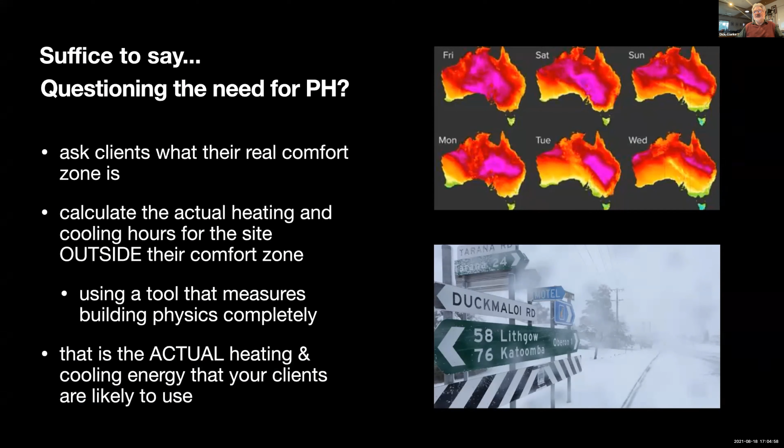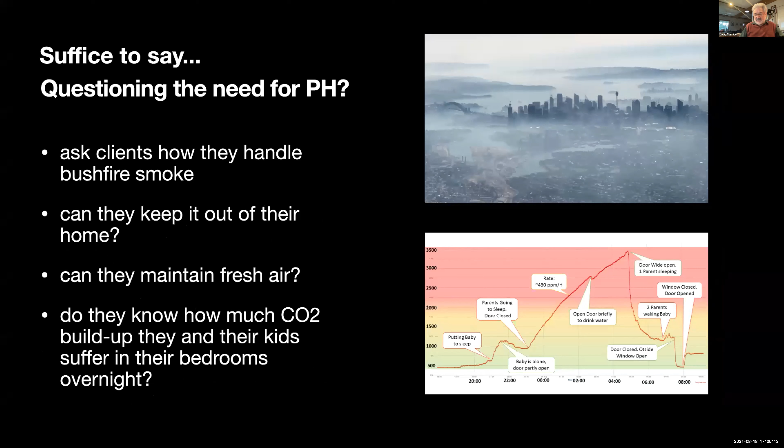So then ask how they handle bushfire smoke. Can they keep it out of their home? Or do they want to keep it out of their home? How do they maintain fresh air? Do they have any idea how much CO2 builds up in bedrooms at night, especially with smaller bedrooms and children? And all of these things really point you towards why would you bother with Passive House.

So you get control of thermal comfort with very low energy input. You can choose when to close up and when to throw it all open, so there's no need to live in an esky all day, every day. Fresh air, with regard to low CO2, is guaranteed when it's closed up, thanks to the heat recovery ventilation. And it can filter, depending on which filtration system you use, which cartridge, up to 97% of smoke particulates, and that's been shown in the last summer, the black summer, from a house in Canberra that was monitored for particulates. So that equals healthy and sustainable, and actually healthy is sustainable, because if it's not healthy, it's not sustainable.

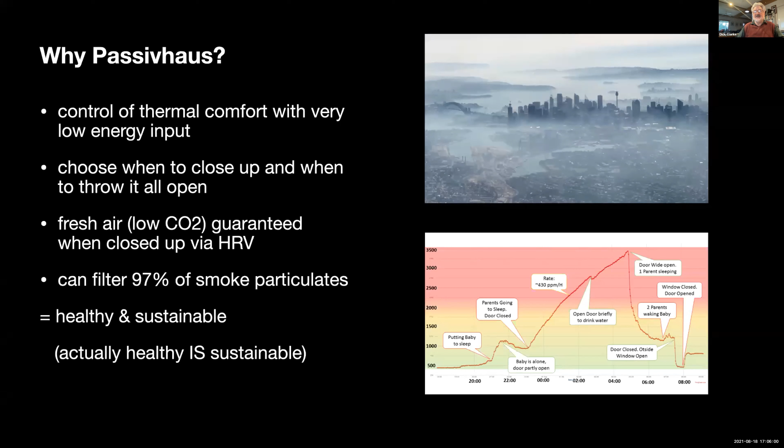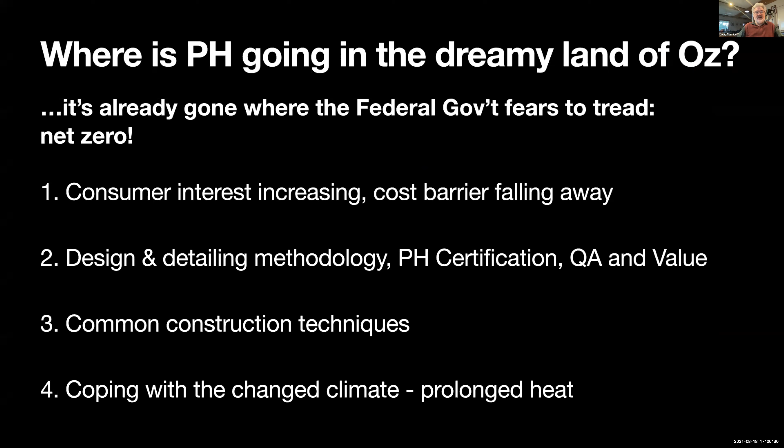So where is Passive House going in this dreamy land of Oz? It's already gone where certain people in the federal government fear to tread, and that's net zero. So I'm going to look at 4 things, and some of them are going to have to be very brief in 15 minutes. Consumer interest and cost barriers. Secondly, design and detailing methodology, what's involved with certification and the QA and value proposition. Thirdly, common construction techniques and where that's going. And fourthly, coping with the changed climate, especially with regard to prolonged heat.

So ripping into it. Number 1, consumer interest increasing, cost barriers falling away. What we've found is that it costs between 3 and 5% more to build Passive House than a classic passive solar. Now that's going to vary around the country, and it is based on using a builder who is familiar with Passive House and understands what's required and does not just charge a great big fear factor, fear of the unknown. In terms of the things that attract: great comfort, no condensation or mold, and better CO2 health.

Compared to the typical project home, which we've found in our experience of consulting to a lot of people on their project home builds, they end up costing at least 2,500 a square metre and up to 3,500 a square metre. So there's a bit of a price difference, but they will depreciate to zero in 25 to 30 years. And that's easily verified by looking at a block of land that is vacant in the same sort of street in the same suburb as a house with a 30-year-old project home on it, and they're about the same price. So the project home hasn't reached the end of its practical life, it's reached the end of its capital value life.

Now, even with BASIX compliance, that sort of building still has high running costs, low to moderate comfort, and certainly no condensation or CO2 health certainty. So if you swap out a bit of size, the second media room, for quality and performance, then you get a better result, which consumers are increasingly waking up to.

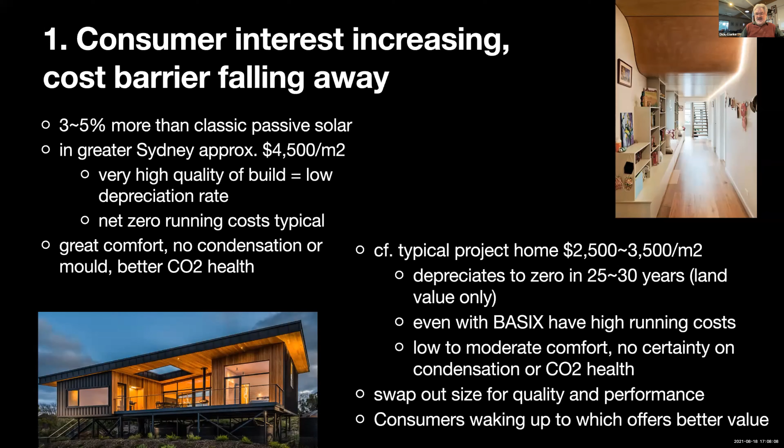Second point, design and detailing methodology. It certainly helps to keep Passive House in mind from the first sketch stage. Cubic buildings work better, yes, that's simple building physics, but articulation is okay if it's not out of control. Now that's true in most climates. Alpine climates, you probably still end up pretty much with a cube, and that's logical when you think about it.

Think about thermal bridges in the structure when you're developing the design. Use a Flixo tool, which is shown there on the right. Timber is certainly easier than steel and concrete, but these two materials can be insulated effectively. And we use a lot of slab on ground and sometimes large steel beams to get over big spans and bracing needs.

But for instance, with the slab on ground, we use the ISEG.2 detail, which we've published for general use with no constraints on its use or reproduction.

Passivhaus certification. Look, it's the same the world over. Basically, the PHI, the Passivhaus Institute, you need a certifier, the PHI certifier, and they have a third-party process, and you submit everything to them. They go through it with a fine-tooth comb to make sure that it complies.

And then the third point on this section is about quality assurance and value. The big thing is that it requires everyone on site to keep their eyes on the ball. And that creates a magnificent overall uplift in quality assurance. And then you also have 2 blower door tests, one at lock-up and one at completion, and that is a proxy. It's a test to make sure that everybody has kept their eyes on the ball. And that's the single biggest benefit in terms of longevity of the building, is that you know it's been built well.

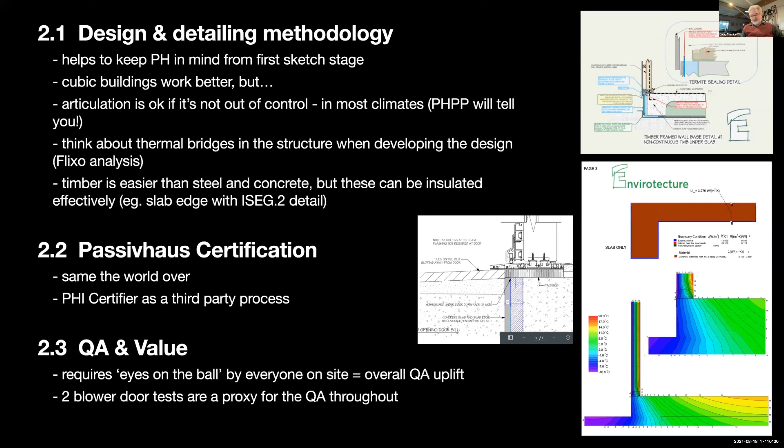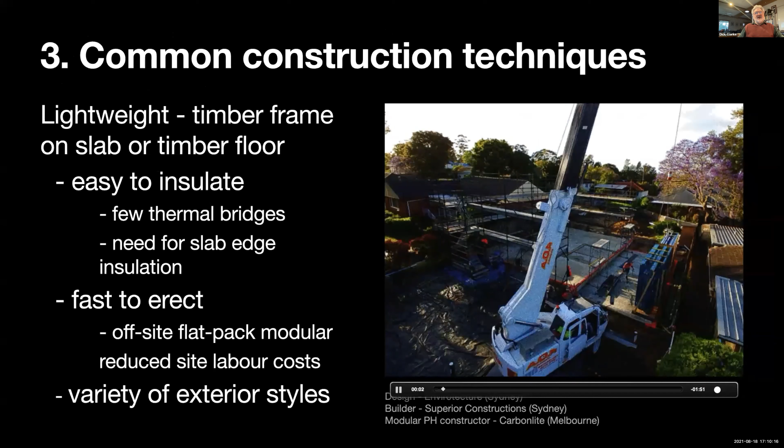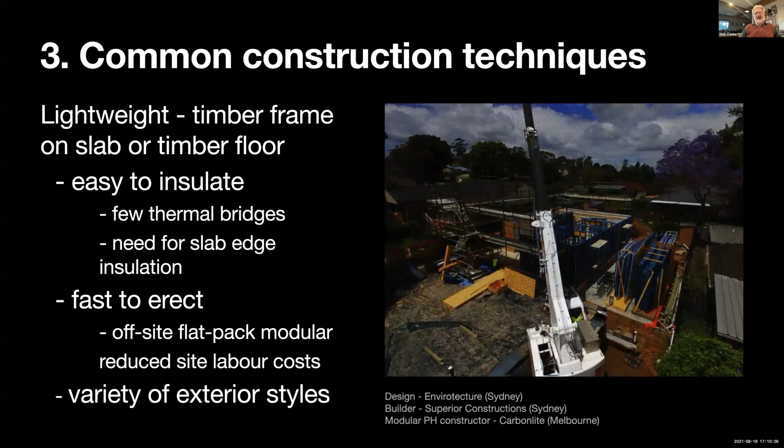With regard to common construction techniques, I'm going to run this little movie. This is a house that recently completed in Asquith, just received its certification. Generally, we're going for lightweight timber frame, either on slab on ground or timber floor. Why? Because it's easy to insulate, you get few thermal bridges, but you still need the slab edge insulation. It's very fast to erect.

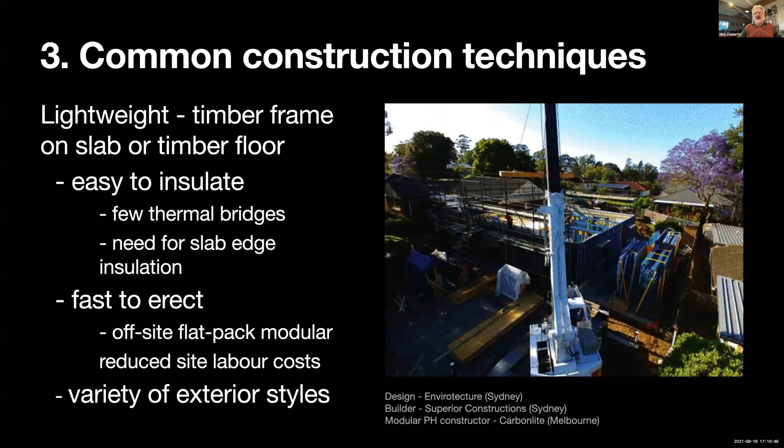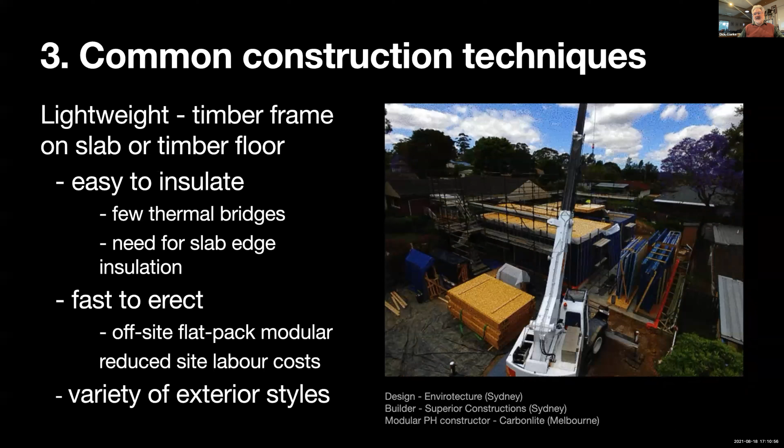The movie here is showing 2.5 days of work on site. We use an off-site flat pack modular construction from a company in Melbourne, Carbonlite. And basically it comes to site, and this one came to site on 2 semi-trailers, and you can see the speed with which it's going together on site. That reduces labour costs for the builder. The builder loves it because they can actually achieve more projects in a year, and with reduced on-site labour costs.

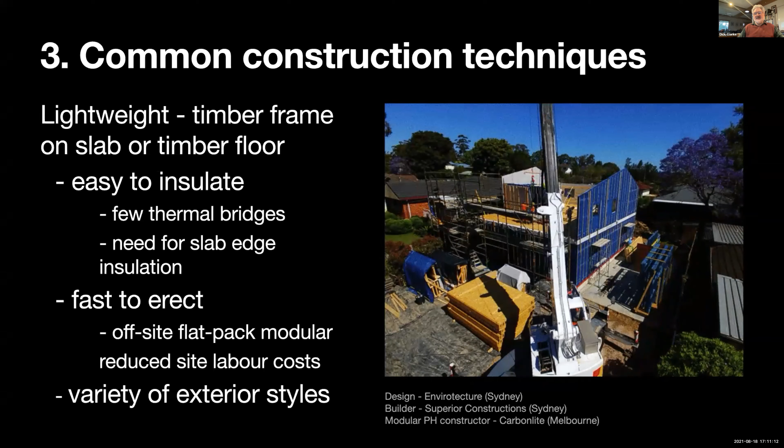But it still gives you heaps of choice and variety in terms of the shape of the building, the overall aesthetic of the building, the external materials. So, you know, Colorbond, WeatherTex, coincidentally, they happen to be our probably 2 most common go-tos for external finishes.

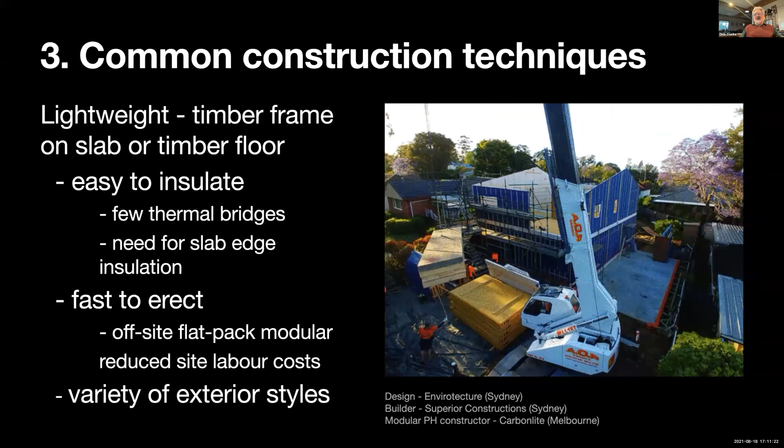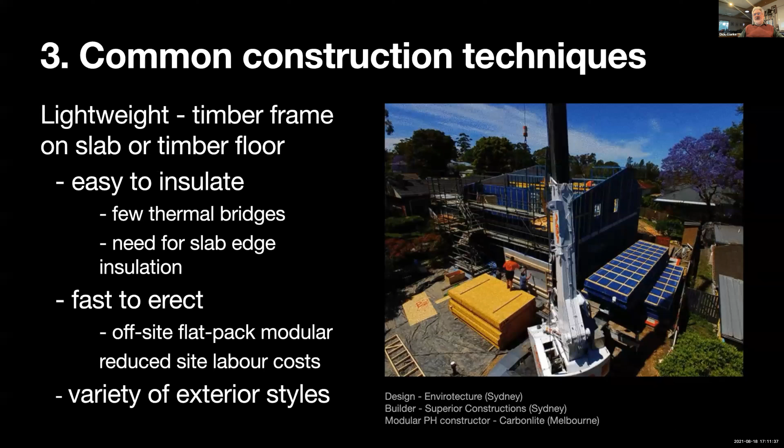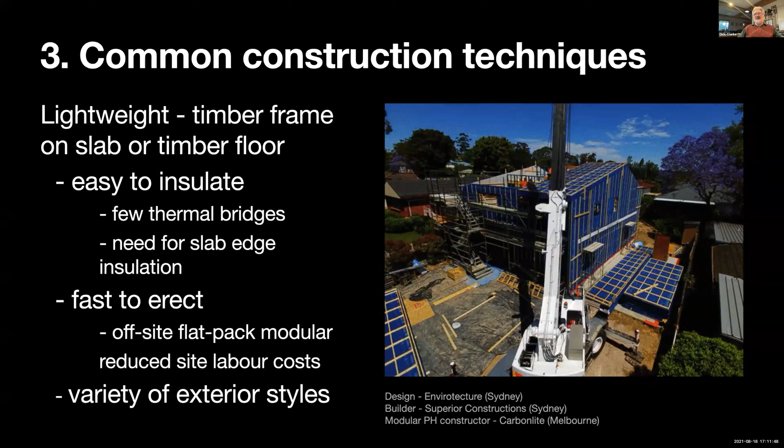And what happens in this situation, using the offsite flat pack modular, each panel comes with an airtight membrane on one side and a vapor permeable membrane on the other, and insulation in the middle, and the structure integrated into it. And at the completion of this 2.5 day project, it is ready for the installation of windows and doors and the first blower door test. That's even before the roof's on and the cladding's on. That kind of all happens in addition to.

So, you can see the roof there with its double battening, the longitudinal battens to provide the drainage pathway, and the roofing just goes straight on there. No need for an anti-con blanket. You can have an anti-con blanket if you want the extra acoustic deadening, but we found that it just isn't needed. The Colorbond roof will go straight onto that, and the condensation will form underneath it. And when it does, it just drips into that cavity and runs straight down into the gutters.

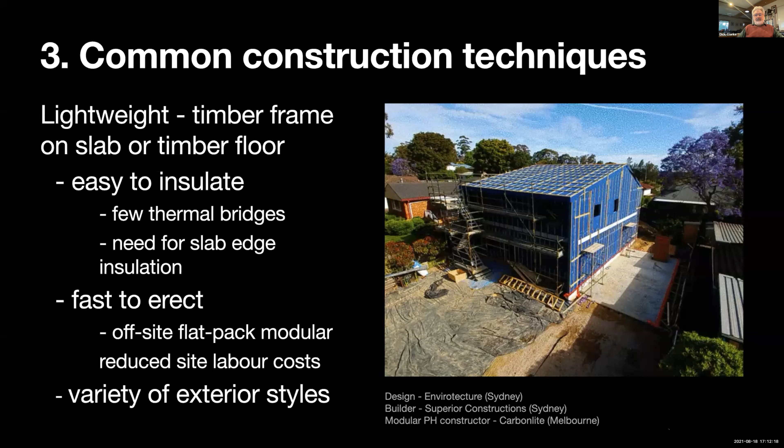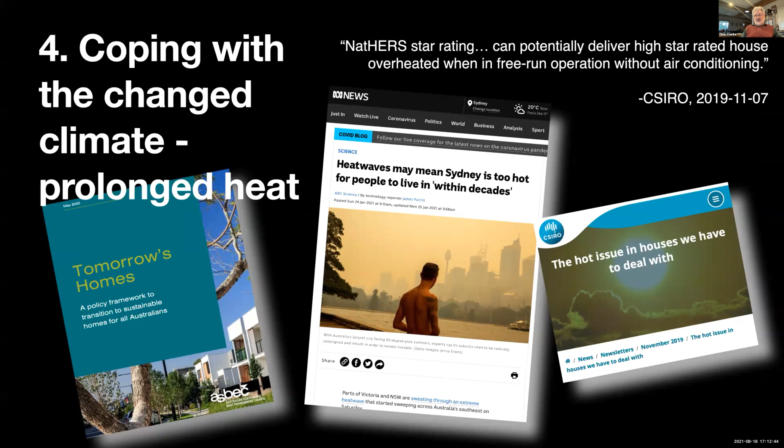So basically, looking back, where did it come from and why? It started in Europe in 1991, and a lot of people see it as only for cold climates, and the kickback that's happened in Australia is that we don't need it. But heat flows both ways, in and out of buildings, and basic physics applies to hot climates too. So that's the key thing that we've learned in terms of how things work in Australia, that we've had to adapt certain details and change certain design strategies to cope with the longer, hotter summers.

But hello, Europe's fairly quickly catching up to us in terms of the hot summers. And this summer has been no exception, a shocking summer with lots of fires and deaths from heat waves. But always remember that the occupants can choose to run the building however they see fit. They can open the doors and throw it open plan living, do what you like. Hopefully they'll understand when it's good to do that and when it's not.

And when it's closed, it really is closed. So it's not leaky. It has to achieve the 0.6 air changes per hour at 50 pascals of pressure. And at the same time, it's giving you controlled, guaranteed, filtered fresh air, not left to some chance leakiness in terms of the construction, which is just a crappy way to build.

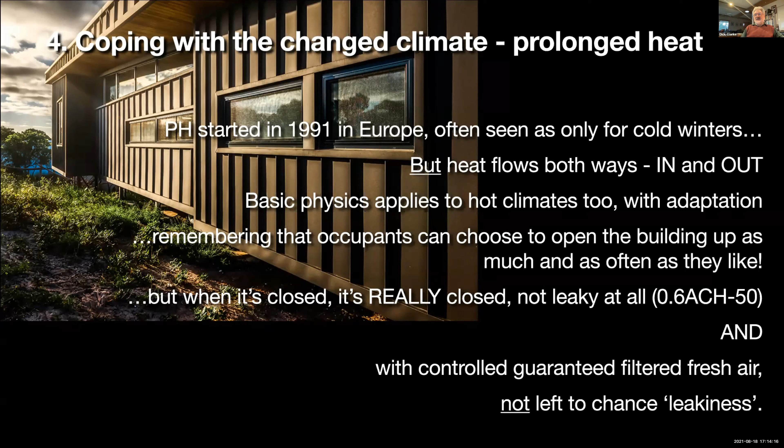So in the winter scenario, Passivhaus traps the internal heat, just people living in it. You throw off heat, I'm throwing off heat just sitting here. And so are you. Cooking, lighting, everything throws off a bit of heat. It traps that because of the air tightness and the high insulation values, especially on the glazing. And then if you throw in a bit of solar heat gain, that's great.

You don't have to, it isn't essential. So it's really useful in sites that don't get any useful solar gain. You use the HRV to provide filtered fresh air and you achieve comfort on zero energy. A little bit of a PV system on top to run the operational energy. Okay, that's kind of where it's come from. Everybody pretty much understands that.

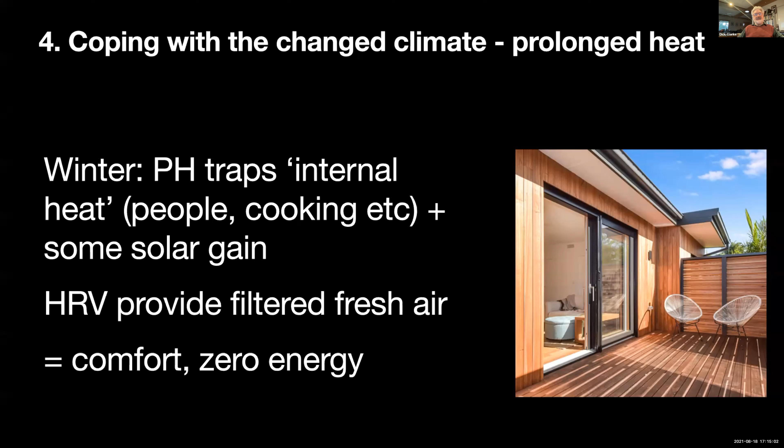Summer, this is where we have adapted things slightly. So Passivhaus still recognises that internal heat is still being generated. The lights are still running at night. You're still in there as people. TV's running. You still cook, perhaps less, but people still cook.

If the air temperature is too hot outside, if it's 30, 35, 40, 45 degrees, where can it dump that heat into? The HRV's running, bringing in fresh air, but it's bringing it in at the external ambient air temperature. Now, if you have a lot of thermal mass in your Passivhaus, that can work for a day or two or three. A 2-week heat wave, it will be overcome as well. And this is exactly the same problem for classic passive solar design.

So our design response, our strategy here is to always include ceiling fans plus a very small air conditioning unit, typically 2.5 kilowatts with a split 2 head. Now, sometimes that's smaller than the smallest unit available, depending on the brand. Most brands sort of go down to about 3.5 kilowatts. And that's okay. It just means it's never going to be running at peak efficiency.

Ceiling fans always, and make the ceiling fans and air conditioning work together so that the ceiling fans have to run before the aircon is turned on. This is all about perceived comfort. Moving air over moist skin gives perceived comfort, and ceiling fans do that on very, very low energy. So always get the ceiling fans running first, and if you hook them up together so the aircon is slave to the ceiling fans, then it makes it idiot-proof. So with the HRV, you get comfort on very near zero energy from a very small PV system.

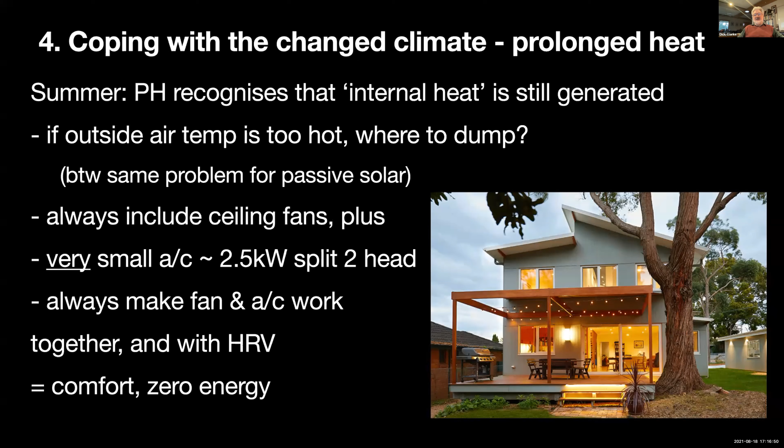So key learnings. I love that word, learnings, things we learned. That's jargon for things we figured out. It is very easy in Australia for Passivhaus to overheat. Lovely in winter, not so lovely in summer. So shading is critical. You've got to keep the solar gain out of the building. It's passive design 101, no matter whether it's passive solar or Passivhaus. Shading is critical. Always wear the big hat.

Air conditioning is more or less unavoidable. In some alpine, subalpine climate zones, it might be avoidable, but we're finding that for the most part, we really need that small system, and it's run by the solar power, so we're still talking zero net energy. Ceiling fans are always great because they just give you that sense of fresh air movement and that little bit of breeze going on. Air conditioning should always be slave to the ceiling fans for idiot-proofness, and that's quite easy to do.

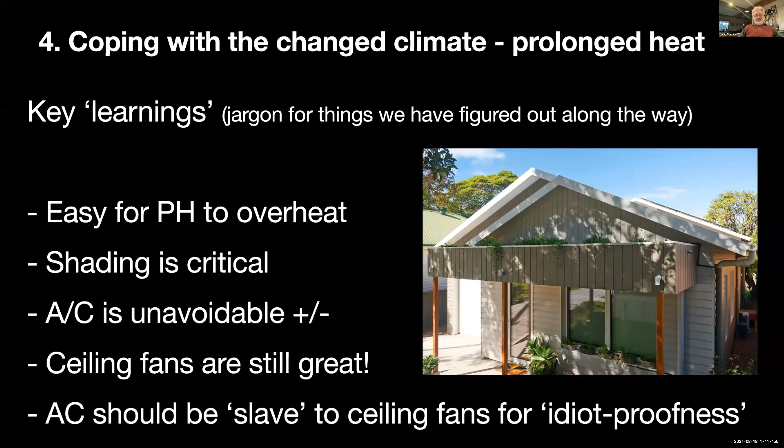So, quick change of colour from black to white. What's next? Well, we're waiting for an affordable integrated air conditioning HRV unit. It's logical at a conceptual level. You kind of go, hey, why can't we integrate these two things? They're both an appliance dealing with air handling. It makes a lot of sense.

We agree with that. But at the moment, there's only one system in its kind of early commercial stages, and it's still way more expensive than just doing it as two separate units. So hopefully that will change.

We're waiting. Hempcrete, wonderful building material, has got so many fantastic advantages in terms of embodied carbon and its ability to sequester carbon and its ability to deal with internal humidity and air quality. It doesn't have a great kind of proven track record in terms of Passivhaus.

We've worked out some details, and the first of our hempcrete passive house buildings is starting construction very soon. So happy to report back on that at some point in the future. Flat pack constructors of the panelised system, that's just got so many advantages to builders. We just need more of those constructors around the country, or more construction plants around the country.

There's certainly increasing consumer interest, and I would say that of the new inquiries we get at Envirotecture, at least half of them want to think about passive house or consider it, or just want to go down that route regardless. And that's a dramatic change over even 2 years ago, and certainly from 5 years ago as a zero starting base.

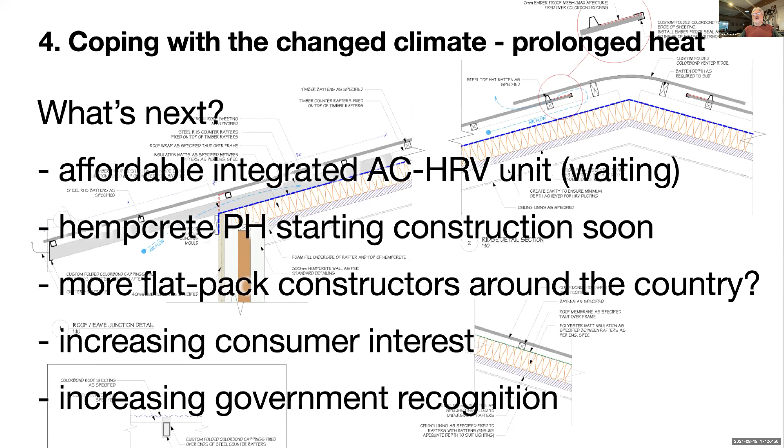So between leaders like BlueScope, leaders like Passive House, we can get on with it and not wait for government, and just simply show how it can be done. And that is 100% done. Thank you very much.